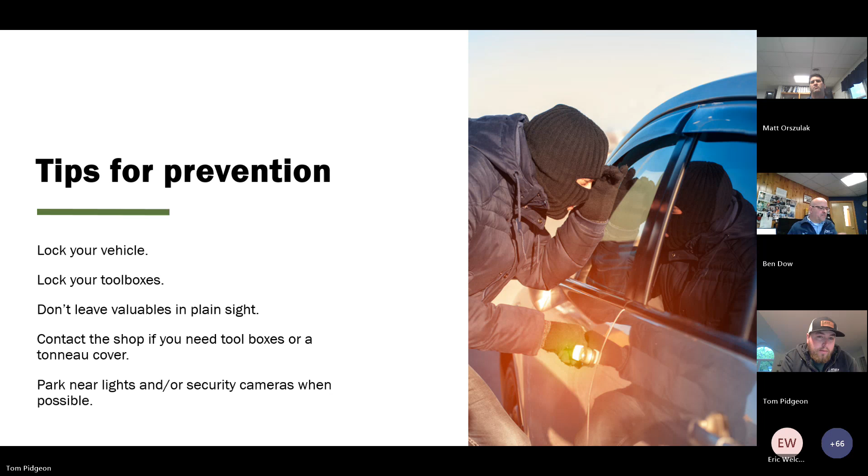Some more tips for prevention. You want to block your trailers and conex boxes with equipment when possible. That's a big one, especially for this weekend. Kind of line up your equipment - normally we try to line it up to look nice, right? But on these weekends in particular, you want to line them up so that way you're really blocking in your trailers and everything, so nothing gets stolen.

You want to ensure that you have the proper locks for trailers and conex boxes. We have the 383s, and then a lot of you guys have your tech locks, which I think are much more secure just because they're harder to cut, right?

You want to take steps to prevent theft of an entire trailer. So you want to either chain up the pintle hitch, or put one of those pre-made pucks into it, right? And you want to avoid the use of hide-a-keys, so use lock boxes if the need exists. You don't want to just hide a key somewhere in your battery box or wherever, because we've had keys stolen from those. And then once they steal the key, then they get into the trailer, and a lot of times they keep the key.

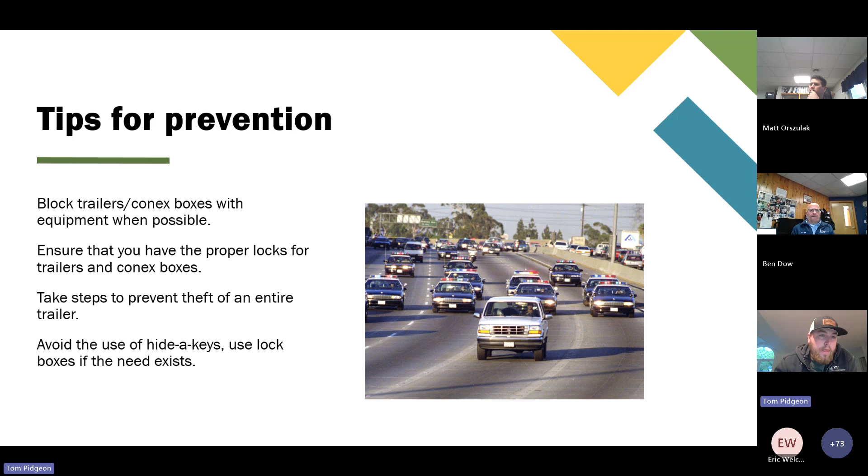And some other tips and tricks: if you want a security camera for your site, reach out to Matt or myself. I don't think we'd be able to get you one for this weekend, but we can get you one going forward. If you see something that seems odd, say something. And just because you're off the beaten path or in a low crime area doesn't mean that theft won't happen. We have some guys that live well off the beaten path that have gotten chainsaws and stuff like that stolen out of their trucks. So be mindful of that.

Don't leave out tools that could help a thief in their endeavors. So don't leave out a chop saw that somebody could use to cut into your trailer, right? That could be a problem. You want to report thefts immediately, and you want to assign workers to specific tasks. So it'd be awesome if, later on today, you say guy number one, your responsibility is to go through and lock everything, and guy number two, your responsibility is to go through half an hour later and make sure that everything is in fact locked and secured. The more people you have directly responsible for certain tasks, the more you're going to get done when it comes to securing your sites.

Historically, the worst places for theft are the Swanton Highgate area and Burlington.

I'm going to stop sharing and kick it over. Does anybody have anything to add on that? Secure it. These long weekends, we always have some surprises on Tuesday morning. People get that extra day to get out and steal stuff from us.

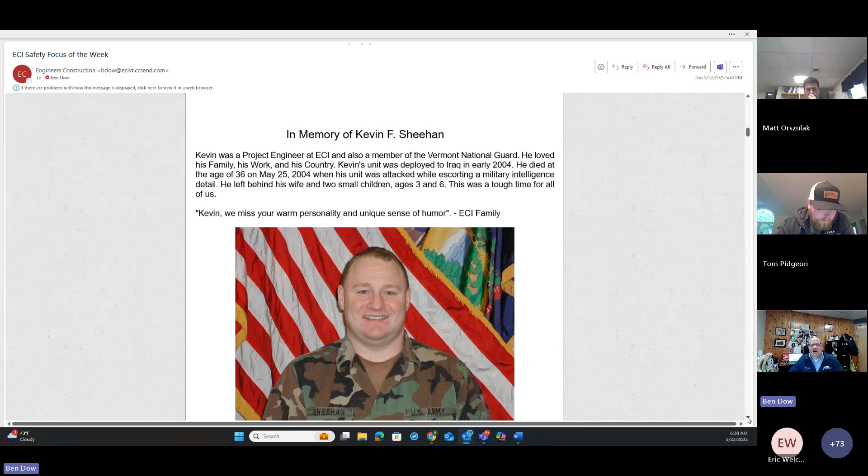So that's good. Memorial Day being Monday, I got a picture of Kevin. It's hard to believe it was 2004, so it's been a few years. Kevin worked here for several years, he was our CAD person.

He ran the CAD machine and did a lot of our drawings and printed out our drawings, but he also was a project engineer aspiring to be a project manager. He built the Milton Park and Ride, if you know where that is, above exit 17 on Route 7. He built that, put that together.

We all helped him out, he was proud of that. The other thing, if you've been through Five Corners, you know the big fountain and the huge memorial. Kevin, ironically, did a lot of the design work, he did all the CAD work. ECI donated a lot of that work for the memorial, and Kevin was the one who actually did all the CAD drawings for the foundations to support the monuments.

A couple of years after we built it, he was honored on Memorial Day of 2005 by everyone, because he lost his life on May 25th, 2004 as part of Operation Iraqi Freedom. Some of you guys don't remember that, but it was in the early 2000s. He was in the Guard, I think he'd been in the Guard for almost 12 years, and they got called out, and he left.

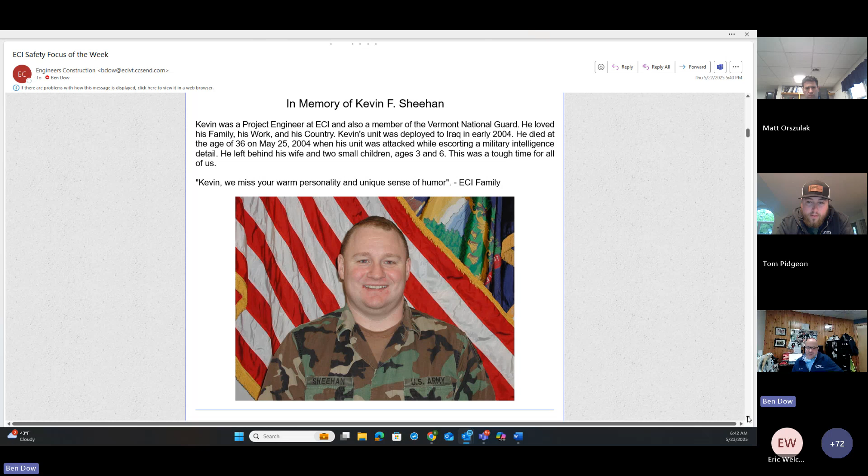So think about Kevin, think about the ECI family. We miss him. He loved joking around and having fun, but he was also very serious about his work, and he exemplified our code of conduct. That's why you'll see little remembrances of Kevin around here.

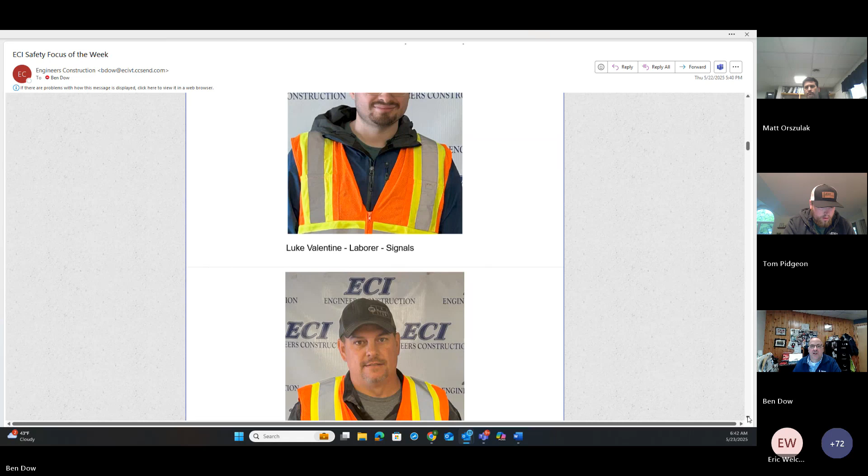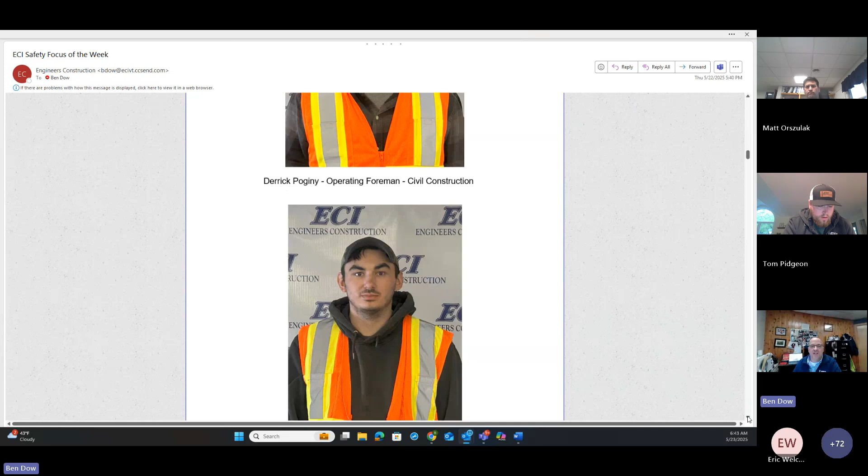We got some new employees. We've got Luke Valentine, he's going to be working with traffic and possibly the rail signals and electrical group. Good to have you here, Luke. We got Derrick Poginy, operating foreman in the civil group. Welcome, Derrick. And Tyler Harrington, who resembles Brian Harrington a little bit. Must be some relation there.

And look at this guy, he's back. Tyler Jewett is back. I think we sent him back to college to learn some more stuff, and he came back looking pretty confident. Welcome back, Tyler, you got your own little spot, returning ECI employee. Kind of cool to keep adding good people to our company.

We've got the ECI Focus of the Week by Eric Welcome. And if you'd like, Eric, I'll drive it for you if you want. Yeah, that would be great.

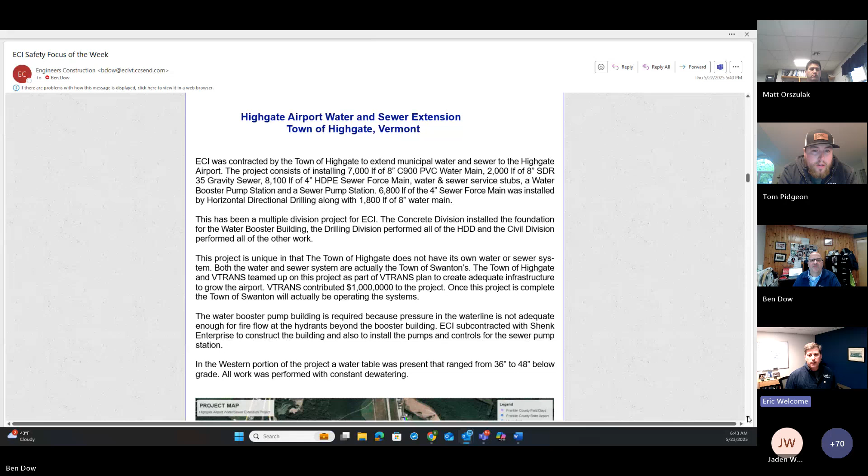But one thing I wanted to say before I got into this project of the week: my roommate first year at VTC, Jamie Gray, was killed in action over in Iraq on June 7th, 2004, by an IED. It's very important, this is a big holiday. I stress to my kids the importance of it, and it's nice to hear how Kevin worked here and the things he did. Something we should all think about this weekend for sure is people who have given their lives for our freedom.

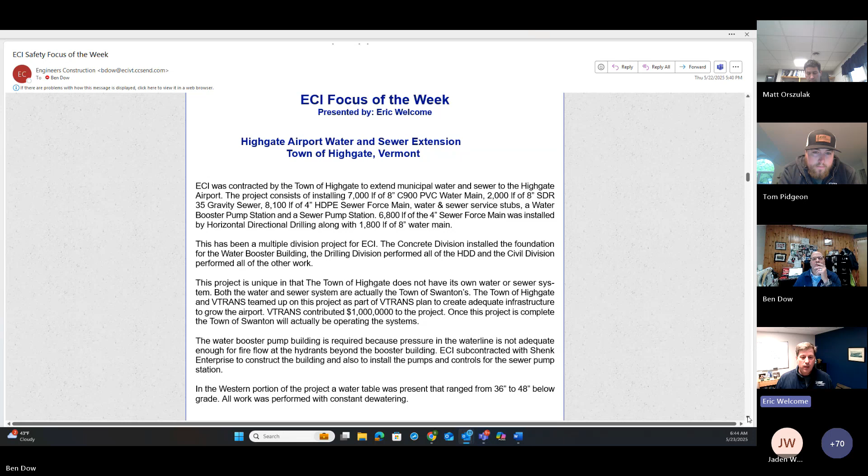Thank you, Eric. So, project of the week: Highgate Airport water and sewer extension. ECI was contracted by the town of Highgate to extend municipal water and sewer to the Highgate Airport. The project consists of installing 7,000 linear feet of 8-inch C900 PVC water main, 2,000 linear feet of 8-inch SDR 35 gravity sewer, 8,100 linear feet of 4-inch HDPE sewer force main, water and sewer service stubs, a water booster pump station, and a sewer pump station.

6,800 feet, yeah, it's a lot going on up there. 6,800 feet of the 4-inch sewer force main was installed by horizontal directional drilling, along with 1,800 feet of the 8-inch water main. This has been a multiple division project for ECI. The concrete division installed the foundation for the water booster building, the drilling division performed all the HDD, and the civil division performed all the other work.

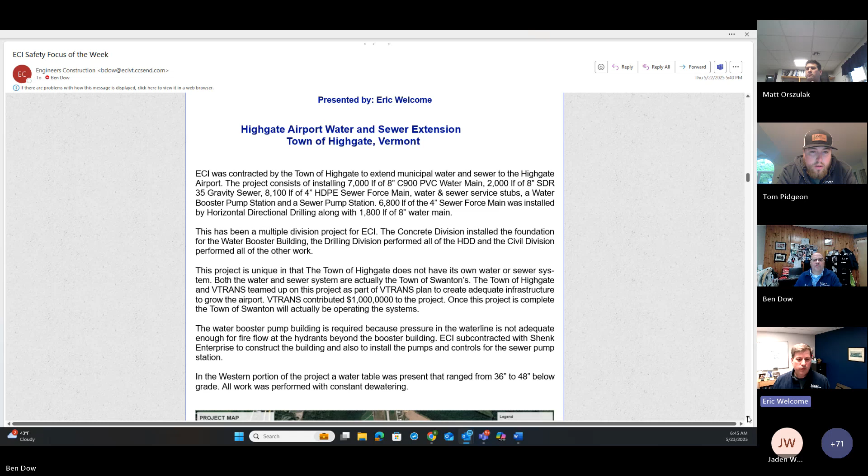This project is unique in that the town of Highgate does not have its own water or sewer system. Both systems are actually the town of Swanton's. Highgate and VTrans teamed up on this project as part of VTrans' plan to create adequate infrastructure to grow the airport. VTrans contributed $1 million to the project. Once complete, the town of Swanton will actually be operating the systems.

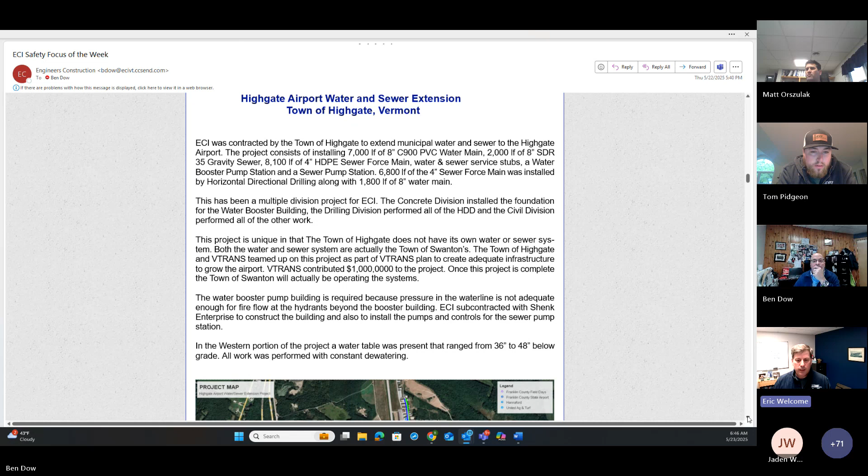The water booster pump building is required because pressure in the water line is not adequate enough for fire flow at the hydrants beyond the booster building. ECI subcontracted with Shenk Enterprise to construct the building and also to install the pumps and controls for the sewer pump station. If you want to scroll down, I created this PDF here.

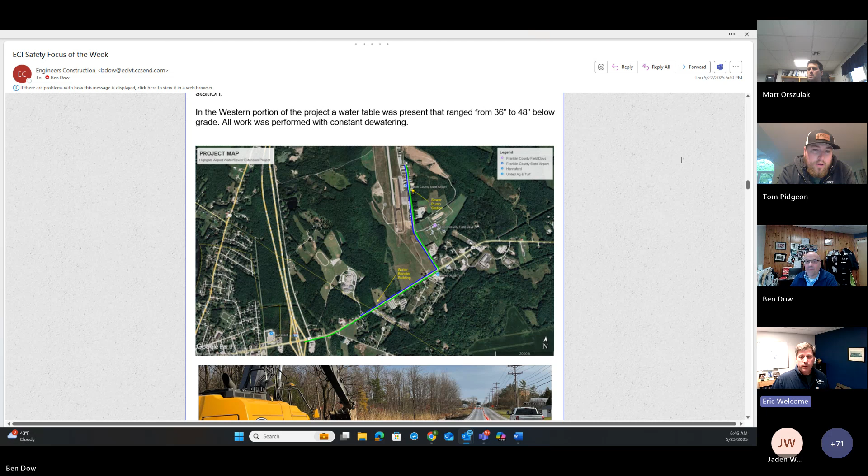The western portion of the project had a water table ranging from 36 to 48 inches below grade. All work was performed with constant dewatering.

In the bottom left of the picture is the off-ramp on Swanton. The green line represents the force main, which was drilled in from that off-ramp all the way up to the corner of Airport Road, then trenched down to where the field days was. You can see the water booster building in the field by the high school. The water line ran from the high school entrance up to Airport Road and into the airport.

It's gravity sewer from basically the airport, inside the airport, to the field days, with the pump station being a low spot, and that sewer is pumped all the way to the existing town gravity main by the exit ramp.

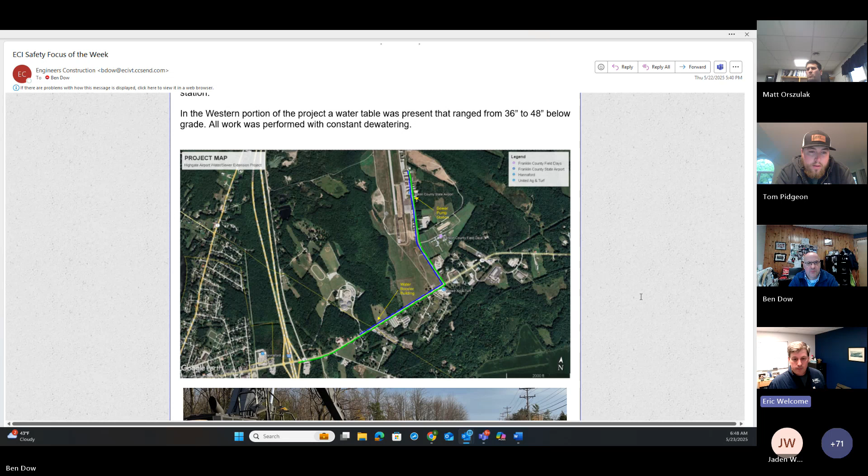Cool, so you want to scroll down? Yep, oh here we go. Got some good pictures, yeah, look at the water.

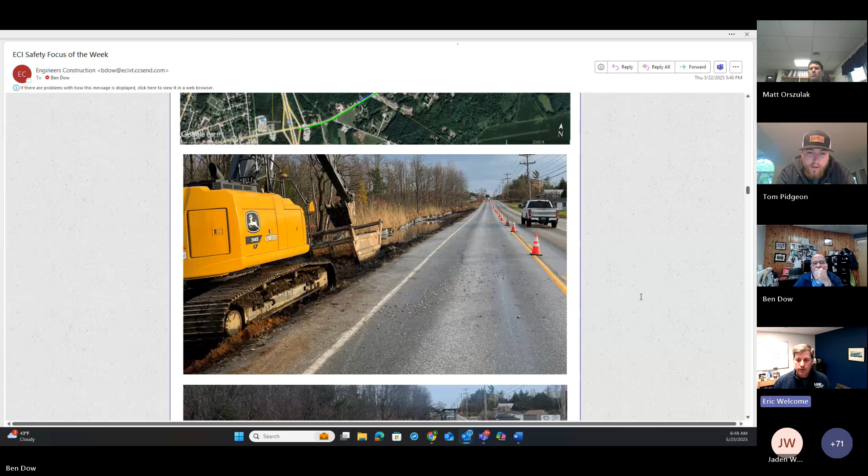There's a couple wetlands here. This day we ended up just calling it because it was too wet. We waited a day and put some pumps in. If you scroll down, this is the next day after we pumped and the water's gone down a little bit.

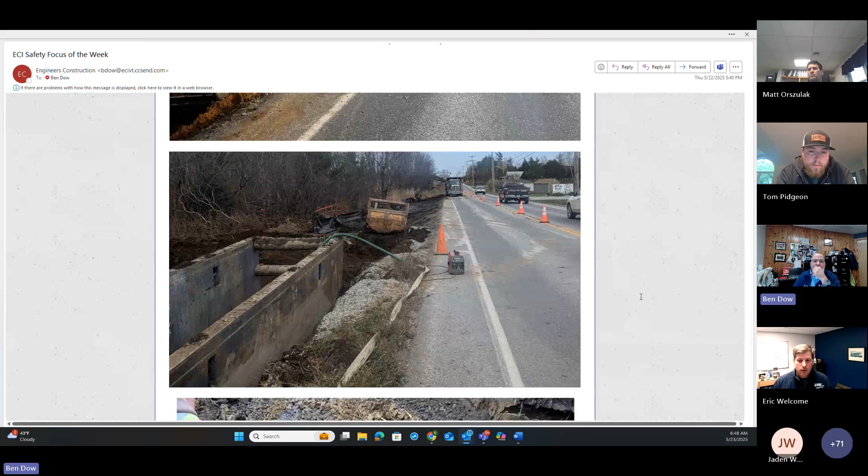Wow, looks like muck. Yeah, there's a good one. Here's Alan. This is what these guys dealt with day in and day out in that area of the project, it was just wet.

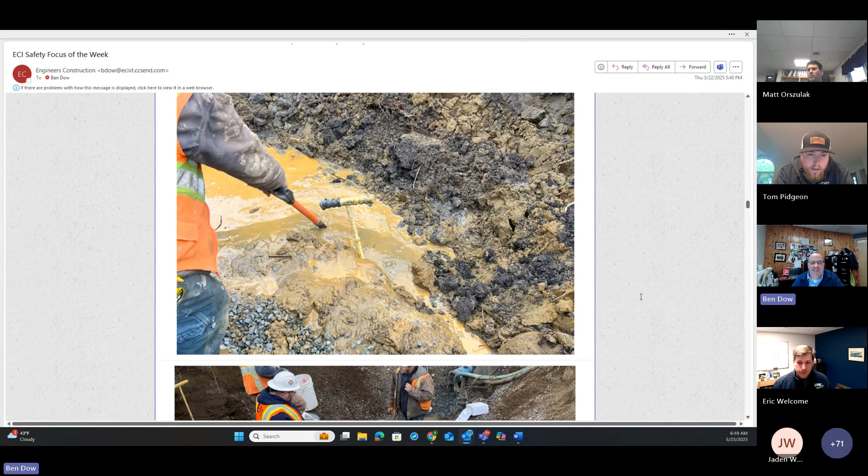So jeez, they did a really good job with it. They go from this, they have to create this. Right? Exactly.

This is out in front of the water booster station. Is that a Y they're going into? That's the first Y I've ever seen put in a water line, I've only ever done a T. There were two of them, one on the other side too, that was a connection. The top right is toward the high school, so the water's coming down, going into this Y and into the booster station. It comes out of the booster station, goes back into the line, and this straight pipe is the bypass. It's 8-inch C900 duct.

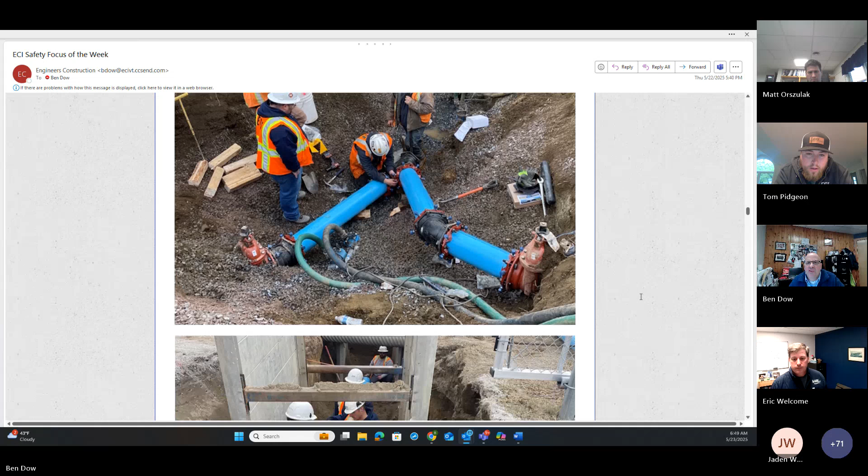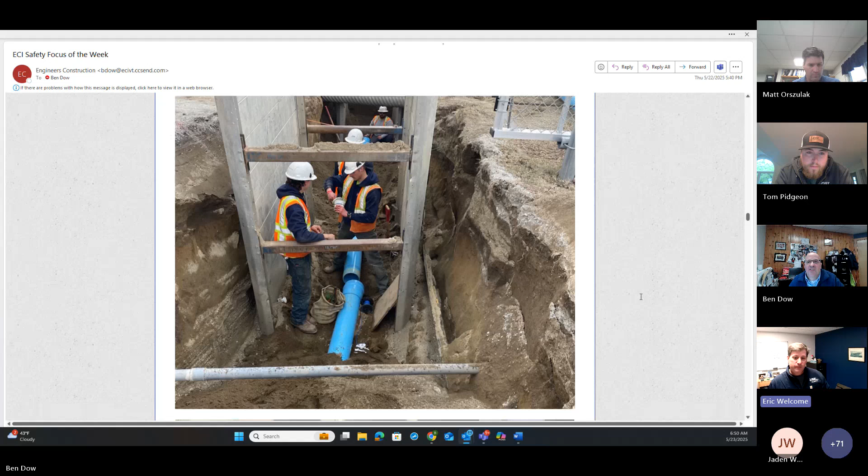Here's the main up at the gate for the airport. You can see we have power in the foreground, then the box. Behind the box there's fiber optic and another power line you can't see, and then there's a culvert.

Just another picture of the water main with a thrust block and a stub for future connections.

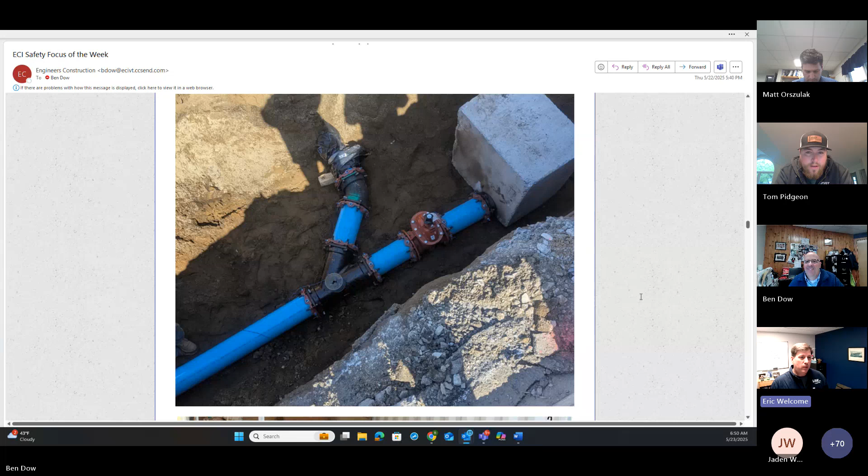Oh, you cheated the concrete guys on that one, you just put a block in there, they didn't get to make that. It's something that's happening more often, engineers are letting precast blocks be used for thrust blocks, which is faster.

Holy cow, there's your stuff. Colton was the project engineer up here, he did a really good job, and so did the other men, keeping everything tidy. I think this was right before winter, they get everything inside and buttoned up for the shutdown.

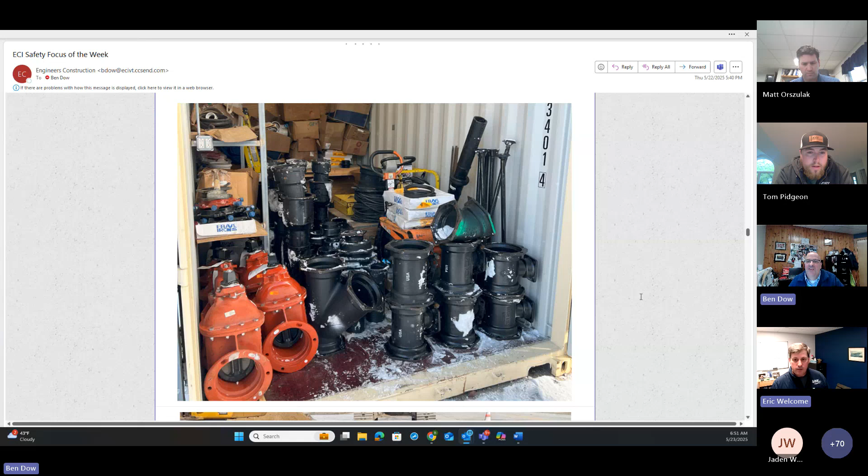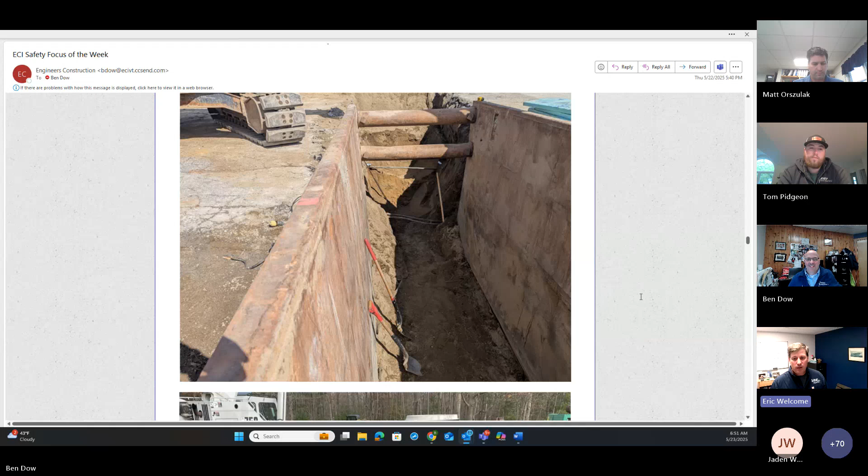There's that Y right there. Hey, an actual good place to dig. Well, except for the utilities, right? Just couldn't get away from them up by the airport, that's for sure, and all the way down along Airport Road really.

We had to drive sheets in order to get that in, so there's a good picture of that. Some other guys went up to contribute to that job. We got to do a shout out to those guys, because they did a great job with the sheeting, that would have been a tough one.

I think this job we tested out the new hammer we ended up buying.

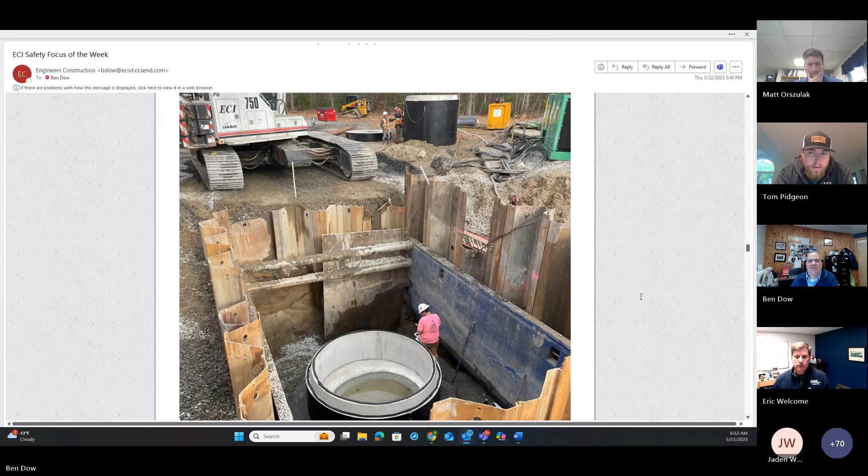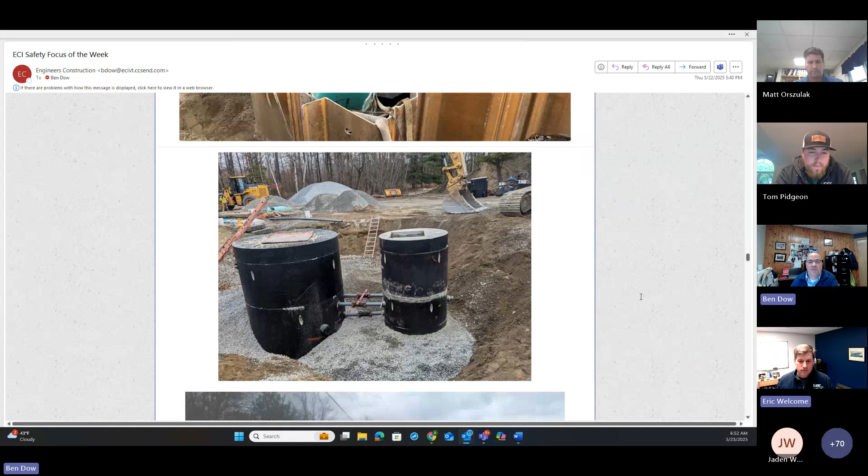Keep scrolling, makes it a lot nicer to have that. With all the interconnecting pipes, there's that valve you have to put between the structures. More boxes. Well, this is the gravity sewer.

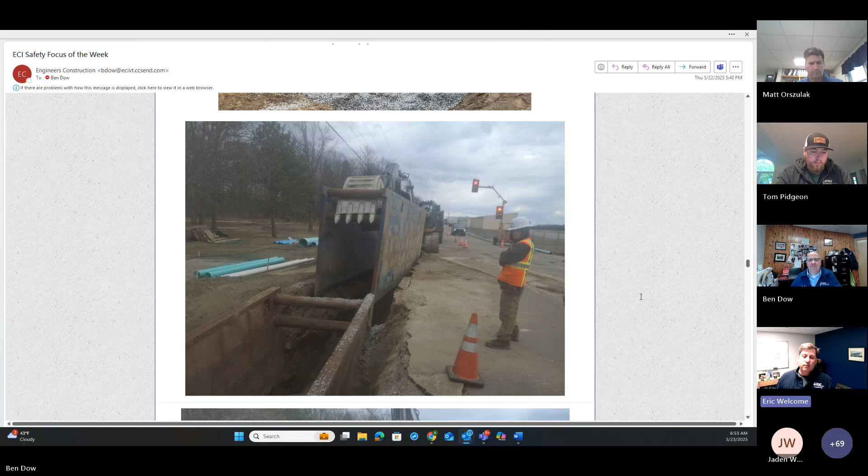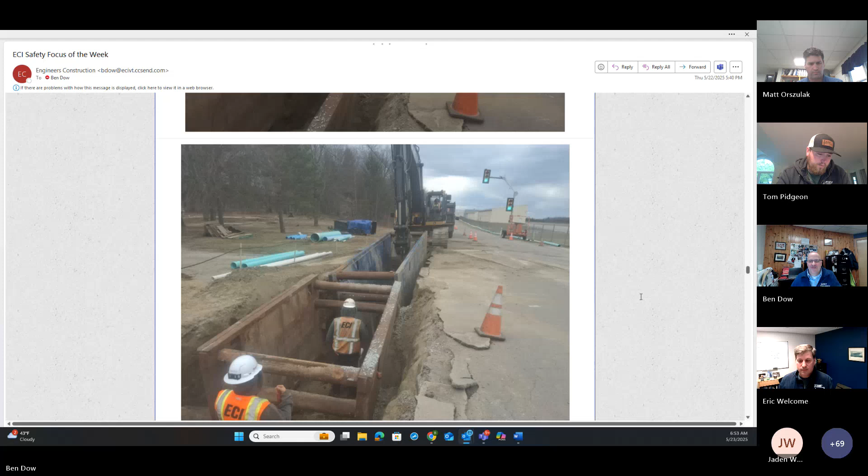In the gravity sewer 8-inch trench was also the 4-inch force main, installed in the same trench as we were trenching. The problem was the 8-inch SDR pipe is 14 feet long and the 4-inch pipe was 20 feet long, so it was challenging, but they did a really good job with it. It often required multiple boxes. That's one of the things engineers never think about, the constructability of some of these, a simple thing like that seems simple but is complicated.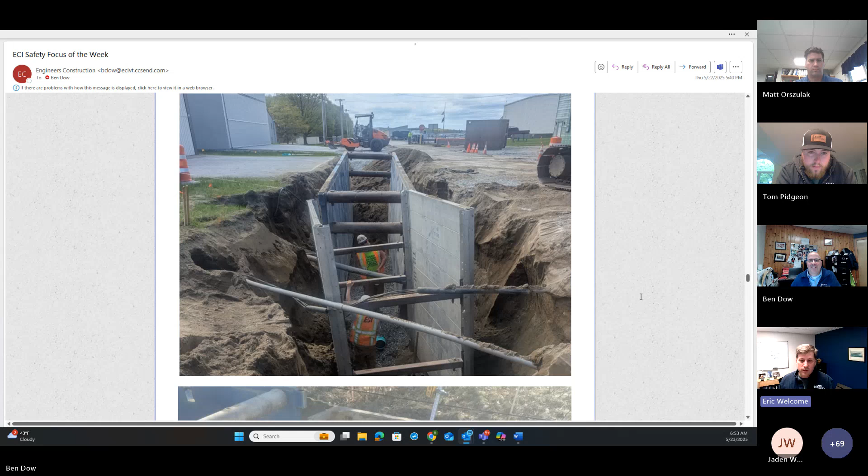Yeah, let's get the box in. And then this crew too, you can see all the utilities in the way, it's just nuts.

There's a picture of a manhole prepped for setting. Looks like they got the target marked.

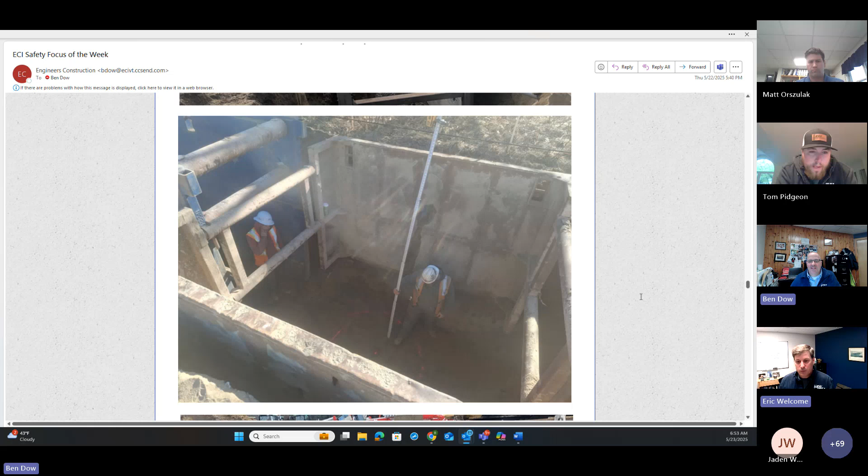What are you guys doing here? That's cool. Yep, there's a couple auger bores for some sleeves under 78.

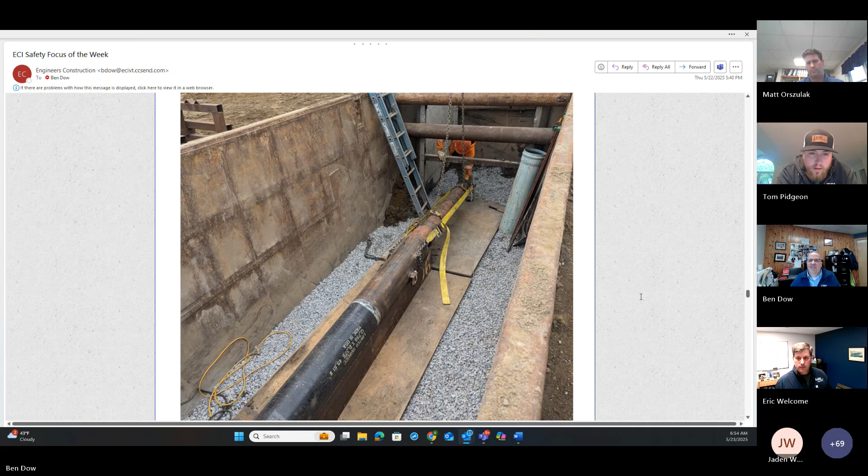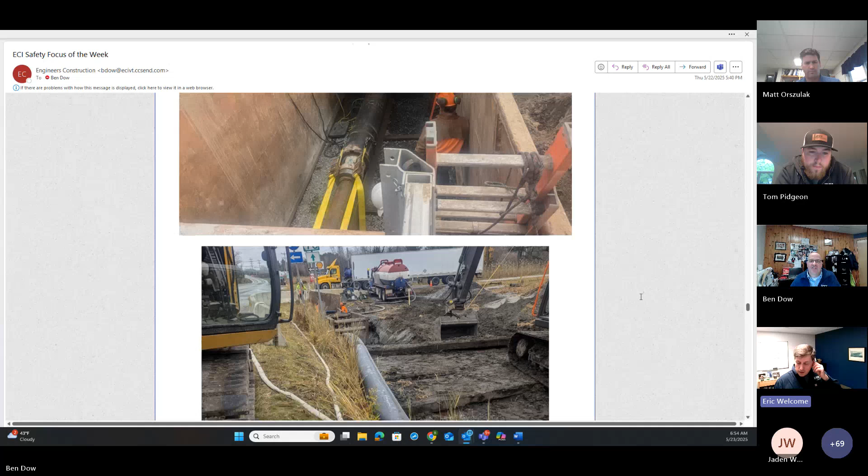This was the most challenging one, down at the off ramp. Water table was 3 feet down. We had a sleeve - a 220-foot long sleeve installed for the 4-inch main to get it underneath the store in the background near the Shell station. It goes from the east side all the way underneath the interstate off ramp to that greenbelt area.

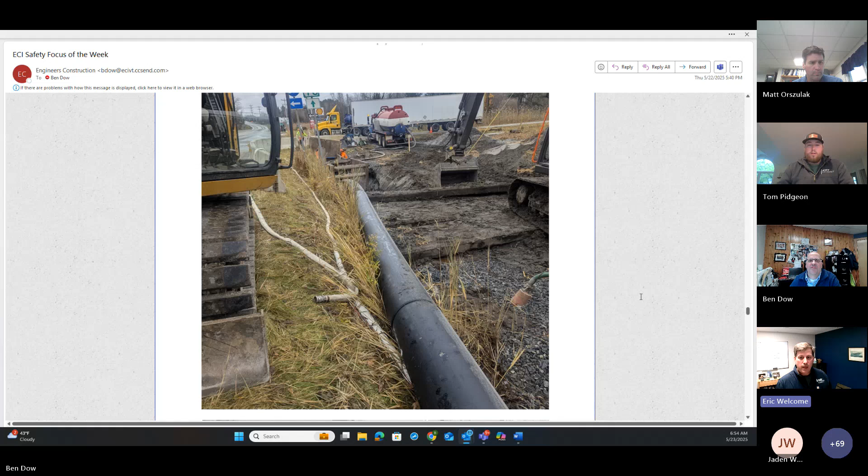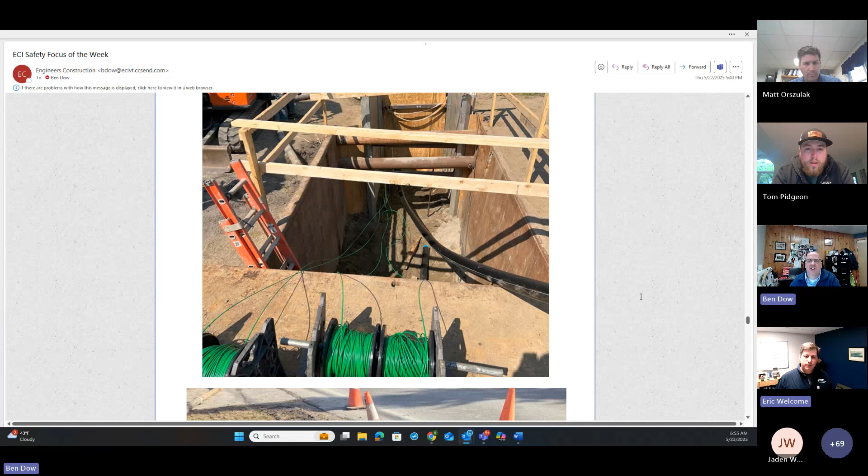You can see, I just threw this picture in because they needed to put 3 tracing wires in. They pulled them back to make sure that at least one of them made it through. They pulled them back with the carrier - that's the carrier pipe there, I think. Through the sleeve, right? Oh yeah, wow, all the 4-inch.

This is the water line that was drilled in, which traditionally you don't drill in waterline pipe because the HDPE pipe is a totally different animal than this C900. The ODs are all different, and they're just not compatible with waterline piping and fittings. But they came out with this pipe - it's a drillable C900. It's got a locking joint, and we got a really good deal from the manufacturer on this.

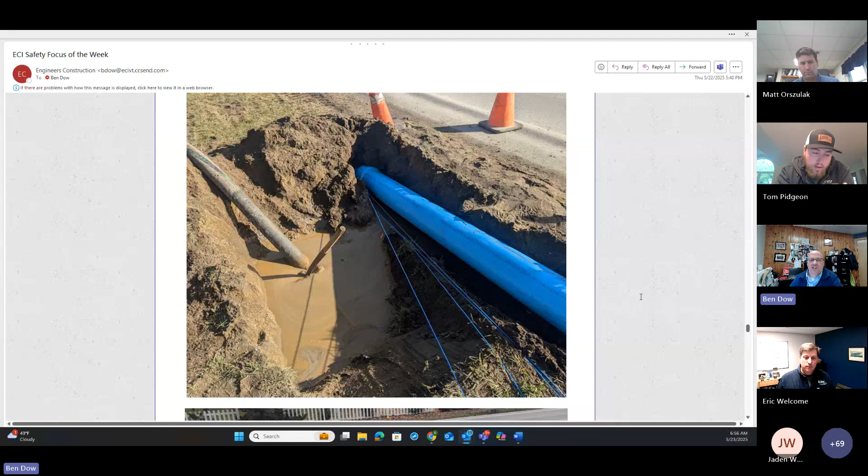As far as I know, this is the first time this pipe's ever been installed in Vermont. So it's pretty neat that the water system can come in afterwards, dig it up, and put fittings and everything on it using traditional ductile iron pipe fittings. That's good for future repairs and changes - good for the drillers too. I think with that pipe, it's going to open up another market.

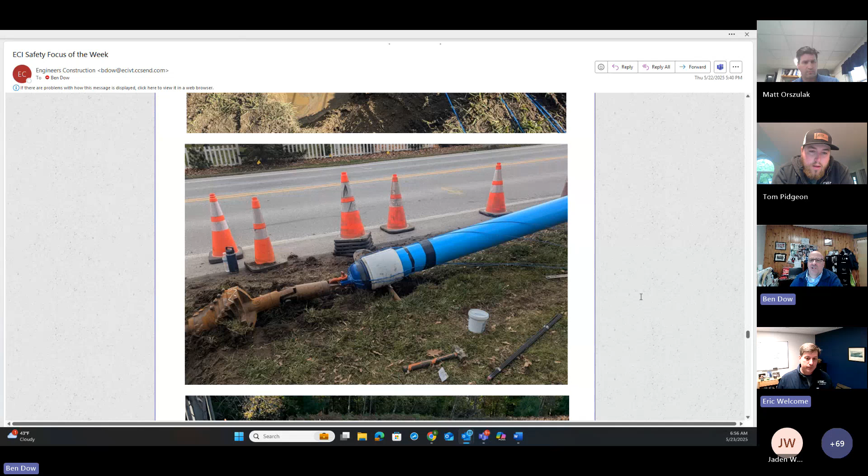And you just - there's the pulling install head, just like we do with the PE. It's like a pulling head and everything.

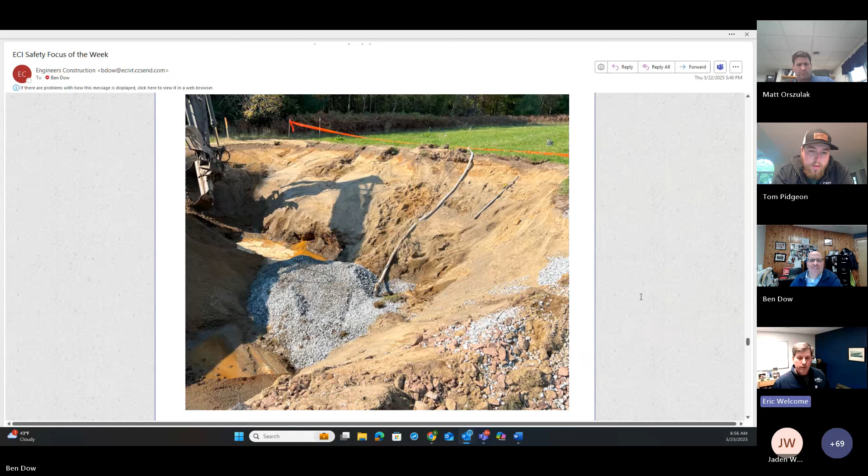Here's the water booster station foundation excavation. As you can see, water table pumps running all the time.

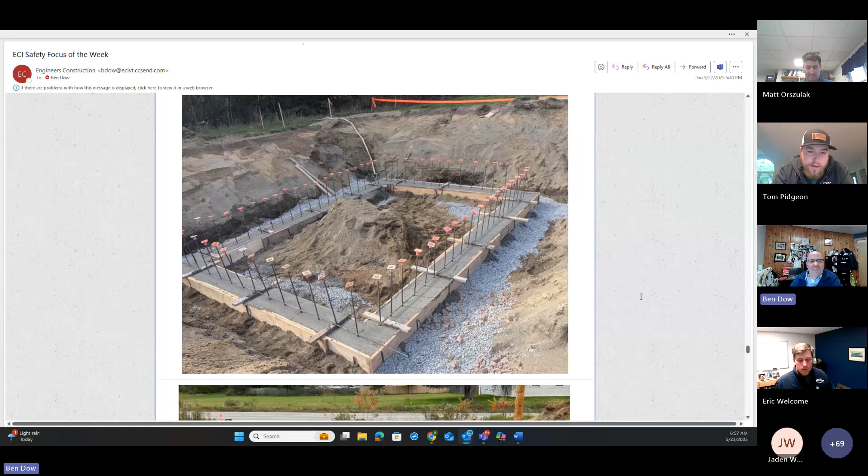Footings - the safety guys like this one because we actually have the rebar caps on every single one, except maybe one. No, they're all there. There's their footing, and did you guys core the wall to put those pipes in? Just cored in after - yep, sleeves.

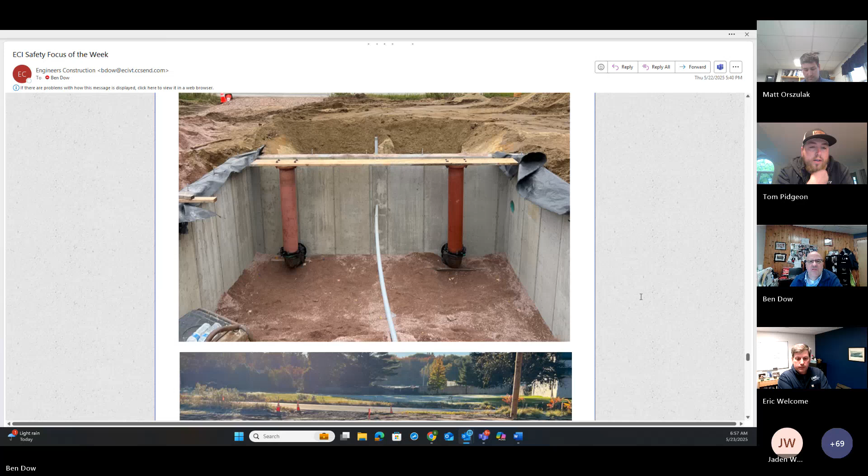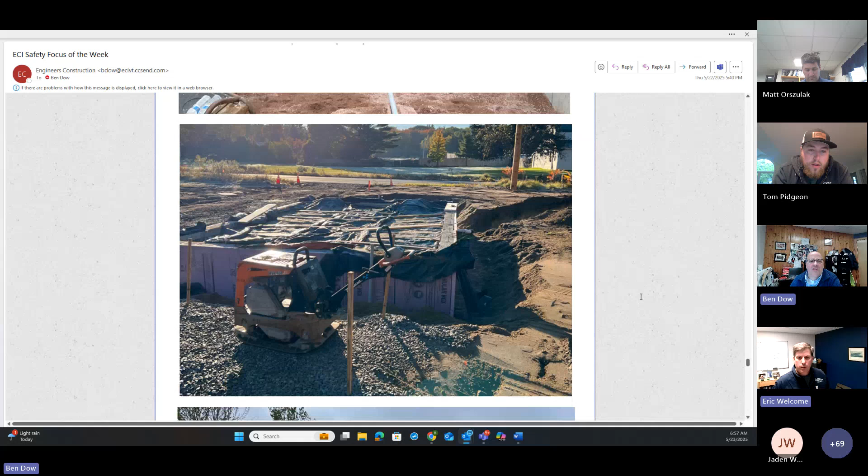Looks like this was maybe last fall. Yeah, I think it was in October, November. Got it covered.

And this is the building done now. Nice, looks good. Booster skid is coming next week - it's being delivered. There's some pictures inside. That housekeeping pad is where the booster skid's gonna be installed.

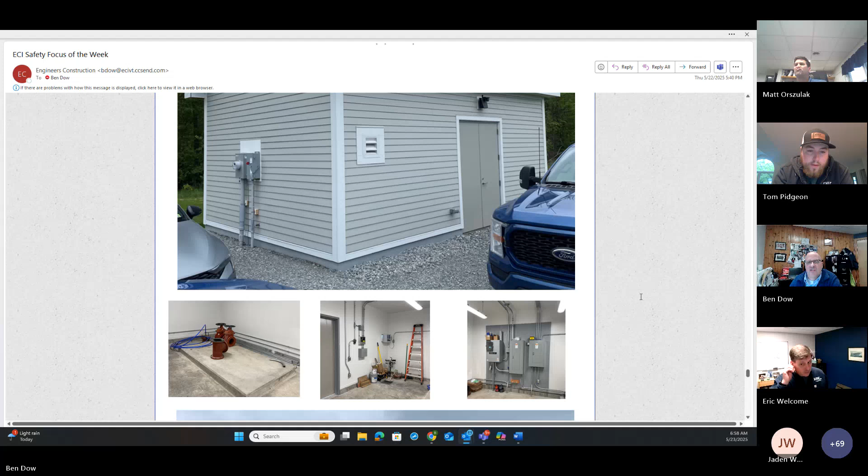Nicely done, nice little utility building. This is a picture of the generator in the back. Holy cow, look at all the green grass.

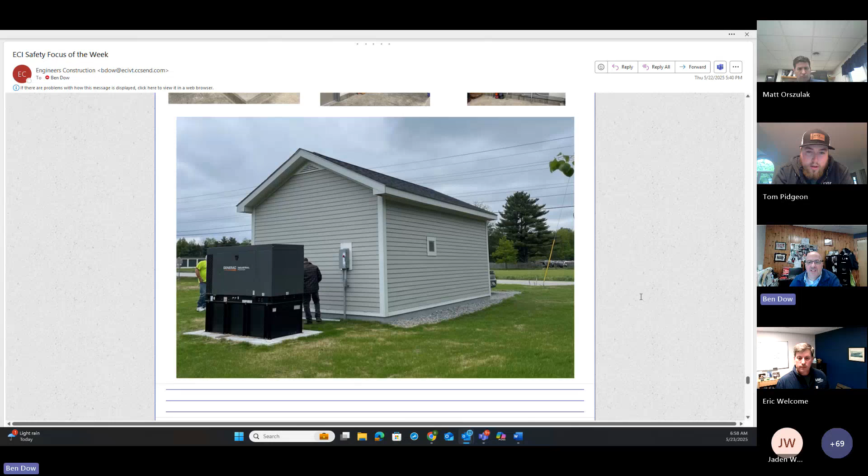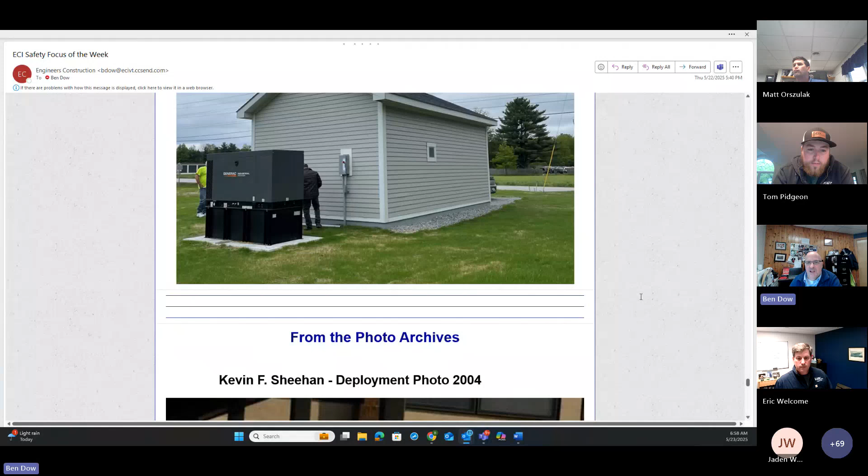Nice looking, thank you Eric. That's a cool project. You don't realize how much was involved until you see it all kind of put together. Well, thanks Eric, good job everybody up there, and I also know that the pavers have been probably involved in that one too.

I found this in the archives. This is just a photo I wanted to have in the email for everybody, especially those that knew him. This is the last time we saw him, when they were getting deployed, and he's headed out with his gear. So I thought that might be a nice one to have to finish off the show here.

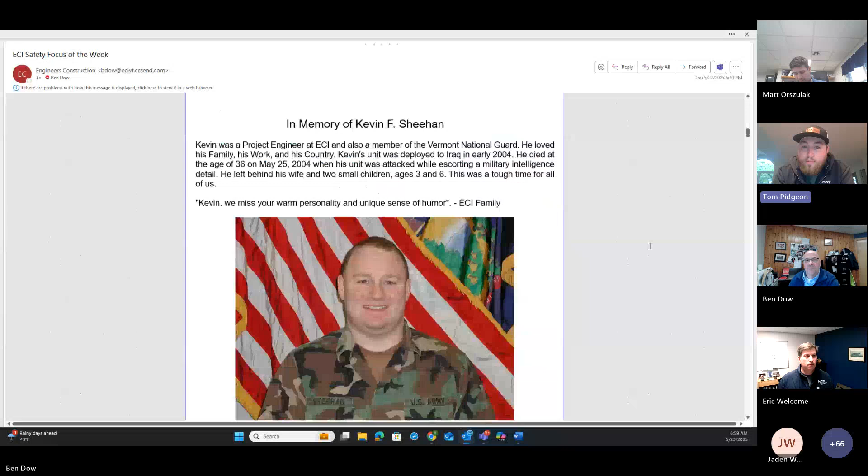All right, well we were talking the other day at the safety committee meeting about how many utilities there were in the ground and how great a job the guys did at avoiding most of them. So kudos to everybody that's been working on that project up there.